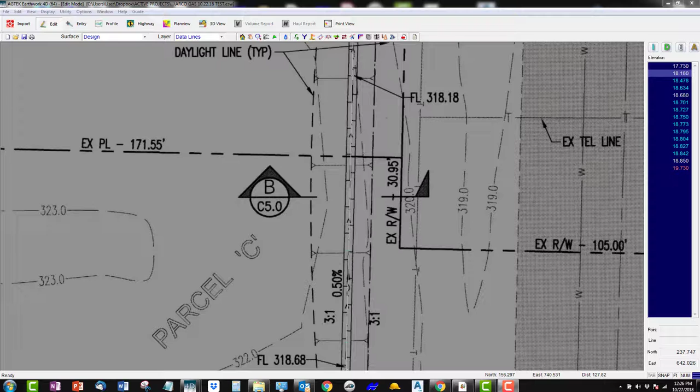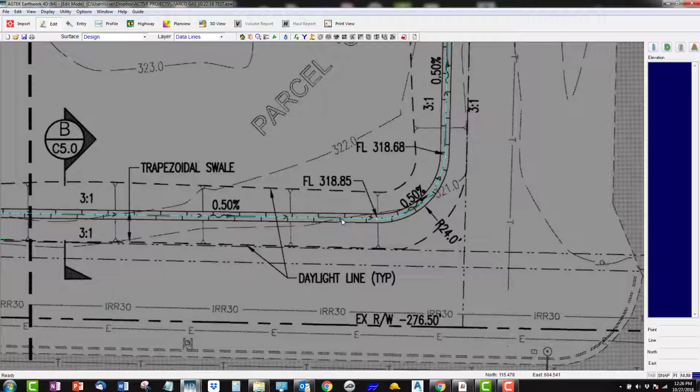Okay, so this is what you do if you have a swale with flow line grades that you've entered in, but you don't have any other elevations. You have a swale that appears to be flat on the bottom, possibly. You have a daylight line on both sides, daylight here and here. You have a center line flow line grade. But how do you build the rest of this swale out?

So right here we have a section detail B C5.0. So you're going to go to the plans, find sheet C5.0, go to detail B, and there's a cross-section view of your canal, your ditch, or your swales. Trapezoidal swale section. Okay, so we can see here we have a bottom 3 foot wide minimum, and it's flat. And then we have a 3-to-1 up to daylight on both directions.

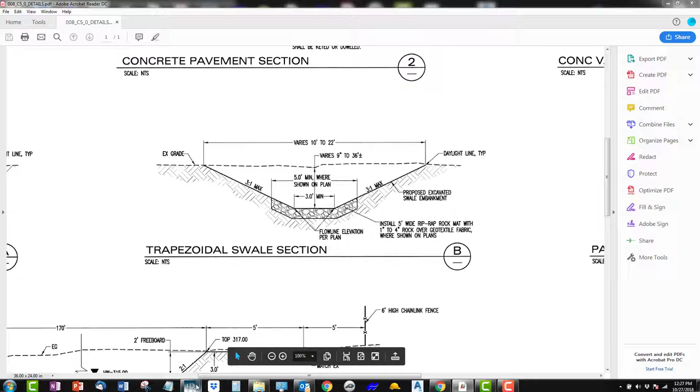So I'm going to go back to the model, pick your flow line, go to offset tool, and we're going to go 1.5 feet at 0 each direction. We're going to call that line a hinge point, HP. We're going to apply, left and right, apply. And now that gives us the hinge point at the bottom of the slope.

Now we're going to take that hinge point, use the offset tool, and click daylight to existing function and type in a 3-to-1 slope, plus or minus cut to fill. Apply left on this side, and there's our daylight to existing at a 3-to-1.

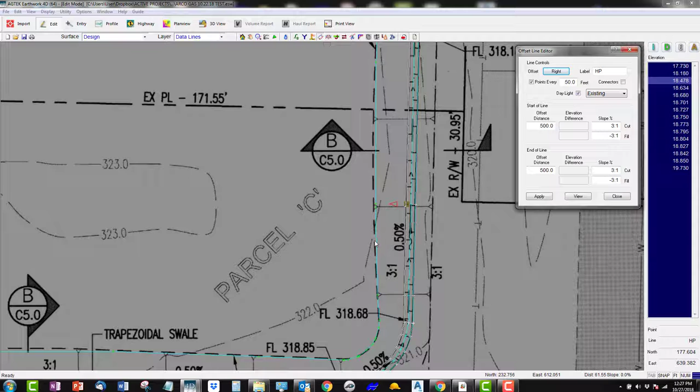Apply, close. Grab the other side hinge point, use the daylight tool, swap it to the right side, apply and close. Now we have a fully built swale with hinge point and catch point daylighted on both sides.

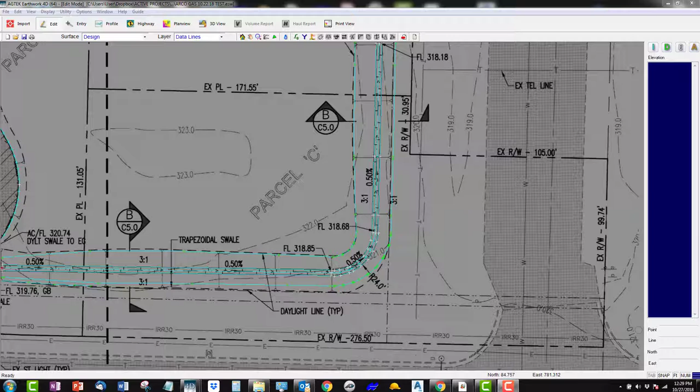So now we're going to look at it in 3D and make sure that it looks correct. Flip over to 3D mode, click on the center. I like to make my vehicle the rod so it doesn't block your view. And there we go, we have a swale that daylights up on both sides at a 3-to-1 with a flat bottom.